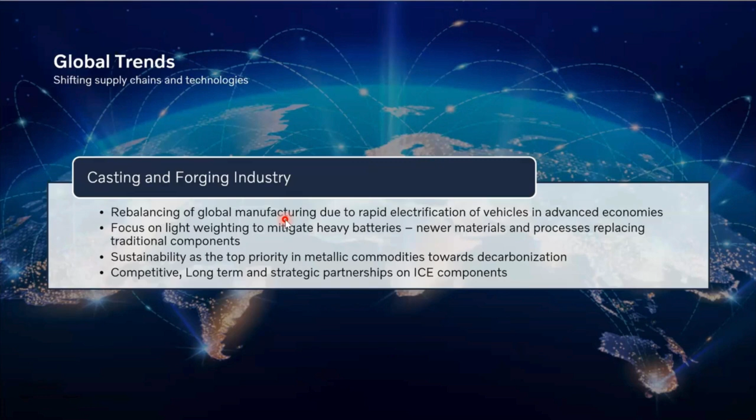And then the third important aspect is sustainability. When we say long distance suppliers, overseas suppliers, there is a lot of transportation, a lot of emission happening, and not only transportation, but from a manufacturing point of view also, there are a lot of emissions associated. So these are some important points, but in the end it is important to be competitive if you want to sustain in a business for the long term.

Yeah, so these are some of the global trends, but what is really happening in India? India is something different if you compare it across the globe. There is some key information about India as a country. First of all, as many of you know, India is ranked lowest in terms of recession in the last few years, and that has consistently been taken care of. We see many countries going into recession. There is a lot of inflation, a lot of job cuts, and so on.

India is also considered to become the third largest economy, and we will reach $7 trillion by 2030. So this is remarkable growth in terms of the GDP we are expecting. We also have had a stable government in the last few years, and a lot of policies are facilitating manufacturing as a segment. As an example, we have the PLI scheme, production linked incentives, which is pushing the manufacturing segment to go for more profitability.

And at the end of the day, India is not considered just a country anymore, but is also considered a partner across the globe by many countries. So there is a lot of impact in terms of strategies, policies, and decision making across countries, which is positive and giving an advantage to India as a country. So it gives a lot of opportunities also. So when you say opportunities, what does it mean? It gives an opportunity to think and work in the direction of sustainability, in the direction of energy transition, moving away from fossil fuel.

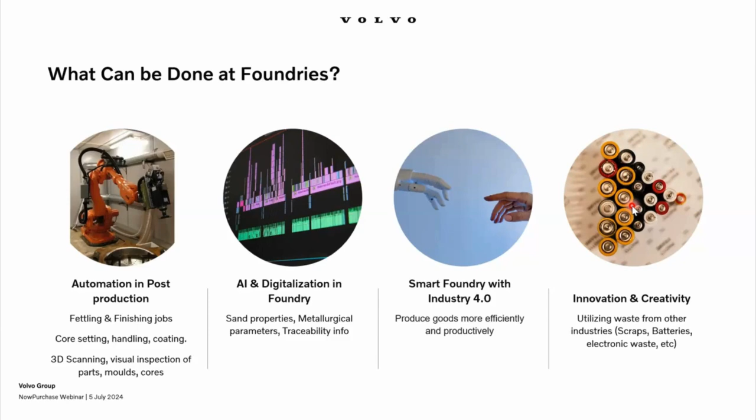And the last important aspect is having innovation and creativity in what we do. This, from my perspective, is the day-to-day job at a foundry. The way you design a gating system, the way you design the tooling, the way you design the process are really important. I've seen foundries using, as an example here, batteries as a raw material, which is an out-of-the-box solution. These are pencil-sized batteries with a steel cap, a graphite electrode, and copper also, which are nothing but raw material for the foundry, and they get these from vendors or from the government free of cost. So we also need to be creative and innovative in this direction. These are some of the areas which we have to think about and explore to be more competitive in the coming days.

Who are the experts in making fuel cells, who are experts in making charging stations available, and so on. So nowadays it's important to have a strategic alliance and even a partnership to make sure that we are meeting all the business requirements. So when we say foundry, what can we do with the foundries? We expect our foundry suppliers to also collaborate with the customers, to have a partnership with the customers to achieve a common goal.

So this is one aspect, but you don't need to restrict yourself to the customers. There are universities who are experts in doing R&D, experts in finding out-of-the-box solutions. So we also need to explore universities for a partnership. Third, but important aspect, there is also a big supply chain and the startups and the foundry supplier base available in the market. As an example, NowPurchase. They have their own unique solution. So we also need to keep exploring this supplier base who can solve our problems.

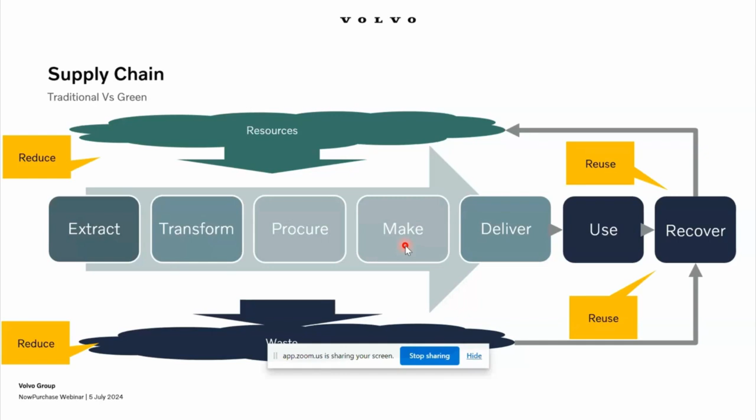So overall, as sustainability towards the foundry, we are expecting all our supplier partners, first of all, to explore more usage of green power, avoiding the use of fossil fuel, really reduce our dependency on petrol, diesel, gas, and go for electrification. There are many solutions available in this direction. As a simple example, many foundries were using cupola, now going for electric furnace, but still in the foundry we use a lot of gas, diesel, petrol. For example, we use them for preheating the ladle, but now the ladles are also electric in nature. Even the steel plants are using electric preheaters nowadays. So we need to find a way to avoid the usage of fossil fuel, because the emission associated with 1 liter of diesel is like 3 kg of carbon dioxide emission. So that is remarkably high.

Apart from that, as I mentioned, we also need to focus on resource consumption. In the foundry, we use energy as one resource, water as another resource, and sand as another resource. I have seen many foundries. If you go to some of the belts, before you enter some of the areas, you see a lot of cores thrown across the road. A lot of cores and molds are used for landfilling. So that's not good. There are solutions available in terms of thermal reclamation nowadays, which can avoid the landfilling. Apart from that, we also need to drive efficiency projects, reduce waste, avoid landfilling, and so on. So these are some of the sustainable ways to make sure that we are profitable within the organization, we are also sustainable, and we are also contributing to the environment. So as a responsible purchaser and as a responsible manufacturer, you have to take care of climate, resources, and people.

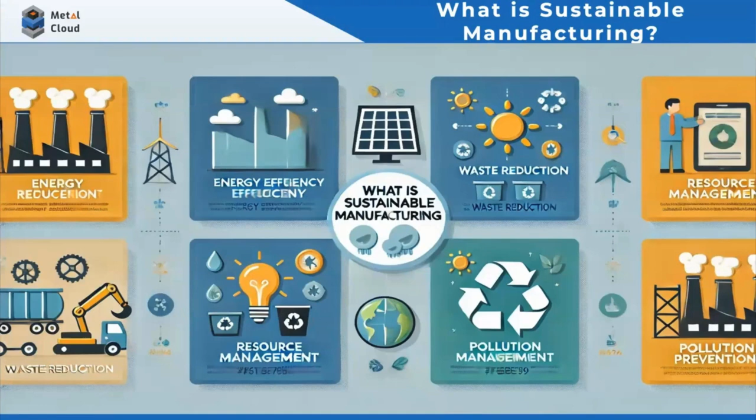Rahul, you talked a lot about how foundries should work on three key parameters: people, resources, and climate. That's equally what we believe, right? These are the three key resources that the word sustainable includes. When we talk about sustainability in the manufacturing sector generally, we talk about energy efficiency, waste, resource management, pollution management, right? But these are not the most important parameters that a foundry focuses on. So I'll be focusing more on the parameters where the foundry can take action to become more sustainable: energy, waste reduction, emission control, and the efficiency of resource utilization. Let's start with energy savings.

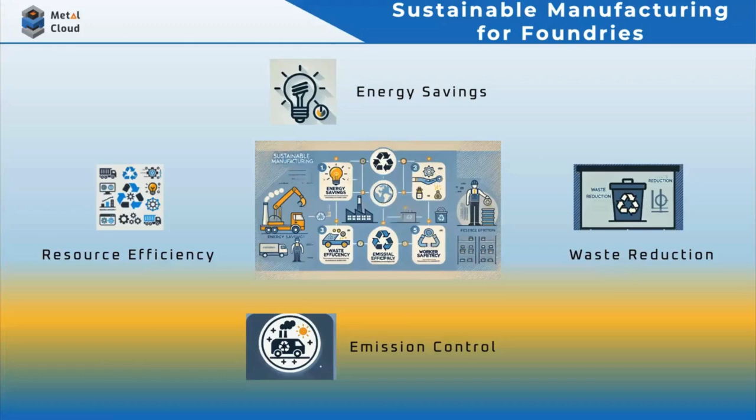When we talk about savings in energy, there are two ways: reducing waste, and reducing energy consumption. There are multiple ways to reduce wastage and energy consumption. One is optimizing charge mix, another is having strict quality control, checking equipment efficiency to ensure proper output with no voltage leakage, and using scraps and pigs and other resources that are less polluting in nature.

For this purpose, we have run multiple experiments. We did this at Brakes India, we are doing it right now at Yash Metallics and Mantri Metallics, and we did it at Tata Ductile Pipe Plant - the elimination of pig iron as a primary resource in casting manufacturing. Typically, if you're a manufacturer of grade 500/7, you consume approximately 500 kgs of pig in a heat, while your scrap consumption is close to 600 to 800 kgs. When you use a charge mix like that scenario, for every ton of liquid metal manufactured, you emit close to 1.6 tons of carbon dioxide, which is a very humongous figure.

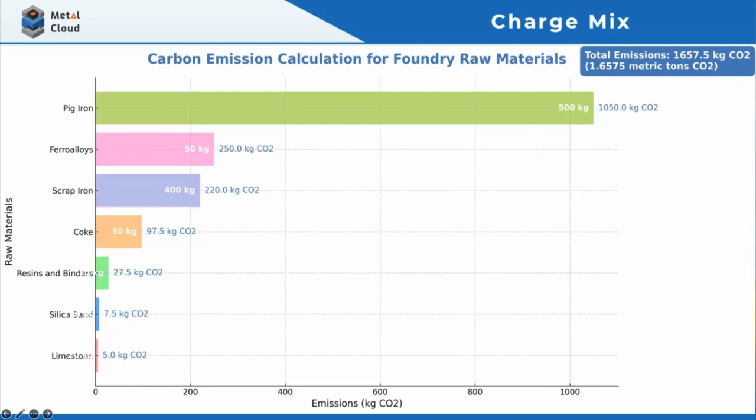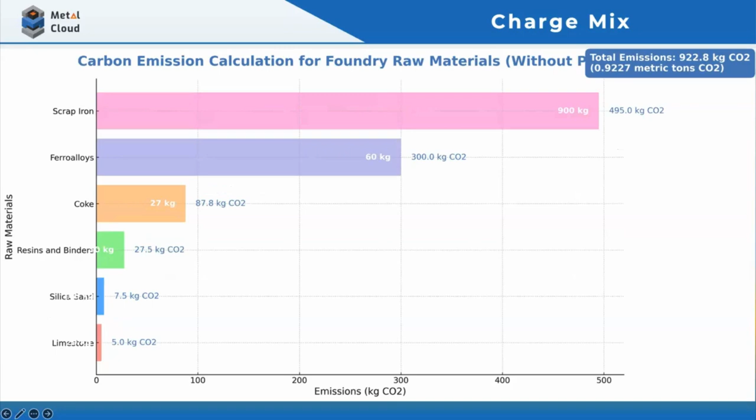When you eliminate pig iron as the primary resource and make scrap the primary resource, the emission per ton for manufacturing a 500/7 casting itself is 922 kgs, which is close to a reduction of 44.3% in carbon.

So just by eliminating one raw material in the foundry, you are saving close to 44.3% of the carbon that is being emitted in that particular process. And that's just from charge mix.

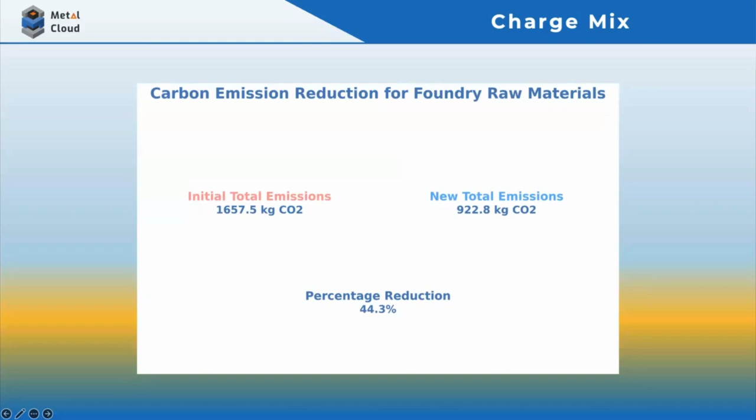This is one of the case studies that we did at Brakes India, where we optimized their charge mix to fully use scrap as the resource, with no usage of pig iron.

Another thing you can optimize on is furnace optimization, because close to 60% of power is consumed in the melting process. One way to optimize power consumption in the furnace is to reduce idle time. How do you reduce idle time? It's the time taken by the worker in the melting shop, either solving a complex problem or doing some kind of work which can be automated.

For example, whenever there is a melt, people generally take a bath sample. Their spectrometer labs are close to 50 to 60 meters away from their furnaces. Someone has to take the sample, go to the lab, take the spark. Then there is the print option.

And when you are printing on paper, you are actually emitting a lot of carbon. A foundry doing close to 100 heats in a day is actually wasting 100 pages. And then there is the loss of time as a worker travels from one place to another with the information.

And the third is the time lost in manual calculation. So you can eliminate those things by having some kind of automation tool where these things are done for you automatically, reducing the idle time as well as the consumption of paper.

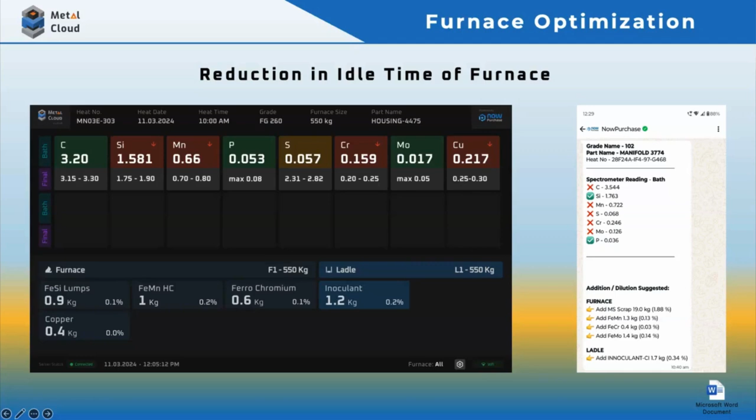One thing you can also do is eliminate loose scrap as well as borings in unbriquetted format. If you use scrap that is loose in nature, it consumes close to 650 kilowatts of energy in an hour. But if you bundle it, it consumes close to 550, a savings of around 15.38% in power consumption as well as CO2 emission.

Similarly, when you briquette the borings rather than using borings directly in the system, you save close to 30% in emissions. Another good factor is that directly putting borings into the furnace causes much higher wastage compared to when it's in the form of a briquette.

Now, moving on, another thing foundries can do to reduce emissions is having tighter quality control. Like Rahul said, before production you should have a kind of prediction. And to have a prediction, you need data. Without data, you won't be able to do any kind of analysis.

So the first thing for any foundry is raw material entry. At the entry gate itself, there should be a thorough check on whether the material you're buying satisfies the requirement of that production. If not, that material should be rejected at the doorstep itself, because every extra step you take eventually leads to wastage.

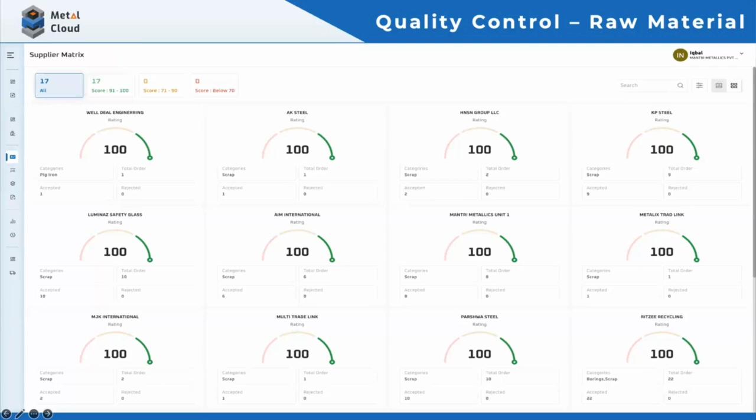Then the second thing is you should also have a quality check on each of your suppliers. As Rahul was saying, you have to have a close-knit community with all your suppliers. You need to evaluate which suppliers are performing better compared to others, so next time you know which ones you can rely on, rather than relying on mediocre suppliers. This reduces the time and resources you consume, and reduces rework. Rework is the most evil thing you can do for a foundry.

Another thing is quality control. When I talk about quality control, let's talk about quality control in the melting section.

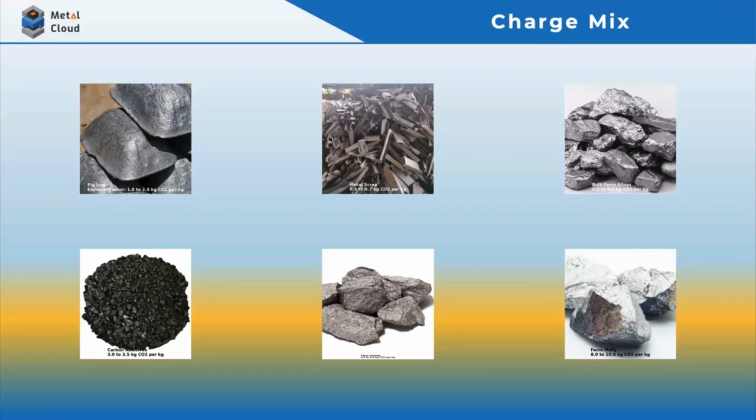And that's where the problem lies, because when you're targeting the mean, it also means you are consuming a lot of additives. If you look at the data, each kg of bulk ferroalloy produces close to 6 kg of carbon dioxide, each kg of carbon additive produces close to 3 kg of carbon dioxide, each kg of ferrochrome produces close to 5 kg of carbon dioxide, and each kg of ferromoly produces close to 8 kg of carbon dioxide. That is worrying data which foundries do not typically take into consideration.

So how do you solve for this? You need some kind of digitization, as Rahul also talked about—digital tools in your foundry where you're able to do root cause analysis, so that next time when you're going to produce something, you're able to predict.

Let's say you track the number of heats you're doing, and if the major cause of concern is carbon, manganese, or silicon, you should be able to predict that if this is going to happen again when producing this grade, why is it that I'm going to get an error in production. And if the error is going to be carbon, why is carbon the error? So that you eliminate it before you produce it, and that's how you save on material cost.

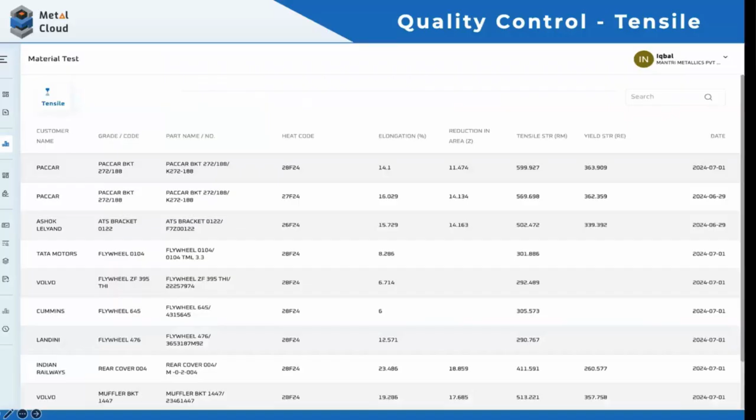Similarly, once the melting is done and the part has hardened, you go for a tensile test. This data should also be readily available so you can see what was actually done in the melting and what you got in the tensile test—was it in the predicted range or not? And if it was not in the predicted range, what went out, and what control parameters changed?

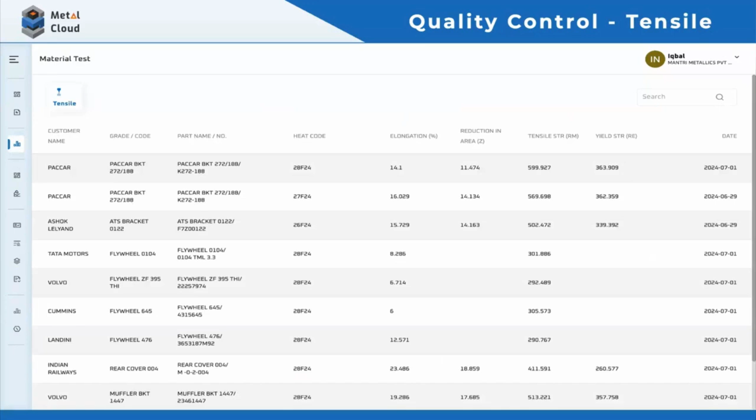So you need all kinds of data in your foundry—be it from your melting section, the spectrometer, the tensile machine, the hardness machine, or the microstructure. You need all this data connected to one source where you're able to get each and every detail.

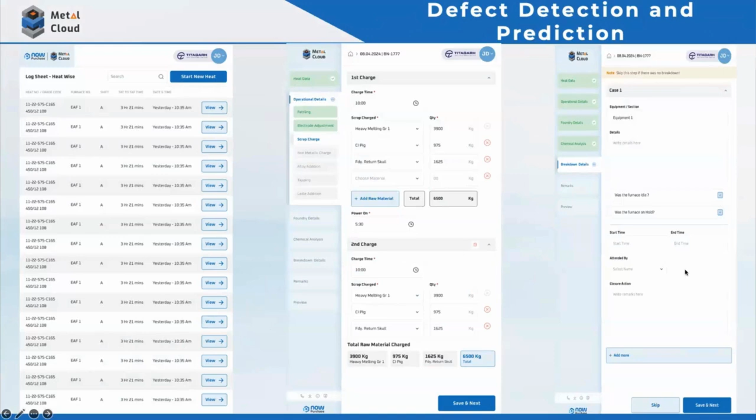For example, this was a project we did at Titagarh, where we completely digitized their log sheet. In the log sheet there is a lot of data available which can actually be used for pre and post analysis as well. So we gathered all the data for the foundry, and let me just show you.

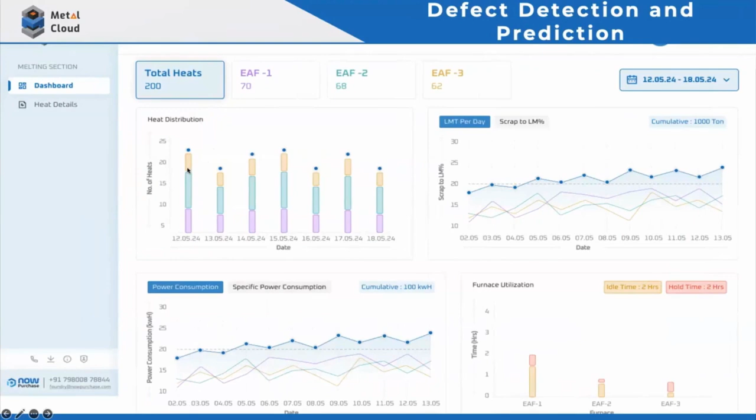Okay, so this was one of the projects we did at Titagarh, and here you're able to see the liquid metal per ton they are producing and the power consumption, and the heat distribution. From here, they are able to gather why they are having erratic power consumption, and because of this we have eliminated a lot of unnecessary factors in production and brought it into a streamlined manner, so that for each heat they have almost similar power consumption rather than sporadic consumption.

Now, let's talk about the eco-friendly practices that you can have in the foundry for more greenery, more sustainability or less carbon emission in the foundry. One thing that you can implement is solar panels, right? Typically, the foundries that I have been to have close to 5,000 square feet of carpet area, of which close to 3,000 square feet is the area available for solar panels.

Now, if you put solar panels on this area, you can actually reduce the power consumption by close to 17.5%. Assuming that each solar panel gives you 4.5 kilowatt hour per meter square per day, you will be able to reduce your day-to-day power consumption in the foundry by 17.5%, which directly translates into a 17.5% reduction in carbon emission as well, right?

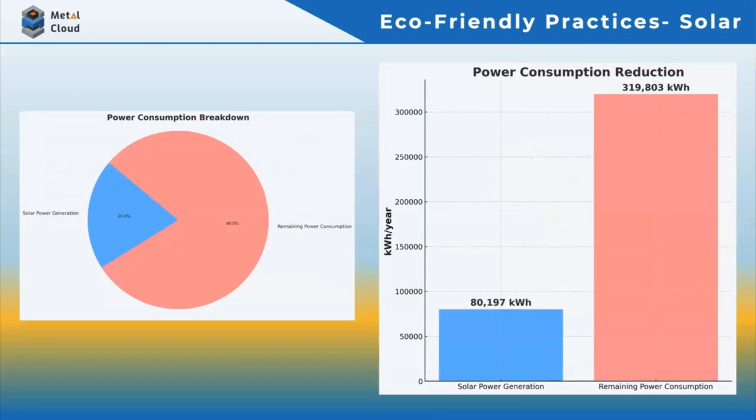And the cost, if you look at it, since the solar panel actually costs a lot, you will typically see that within a span of 3 to 5 years, you will be able to break even. I'm so sorry, right?

And similarly, another very good experiment that I saw at one of the foundries in Coimbatore was waste heat recovery, right? What they were doing with the waste heat recovery system was nothing peculiar, but something very innovative, right? And as mentioned earlier, innovation is the key to solution.

So the mould in which they are going to pour the liquid metal was surrounded with the raw materials which were going to be melted in the next heat, and these raw materials were getting preheated from the heat being eliminated by the mould. And because of this, they were able to save close to 30% in the system.

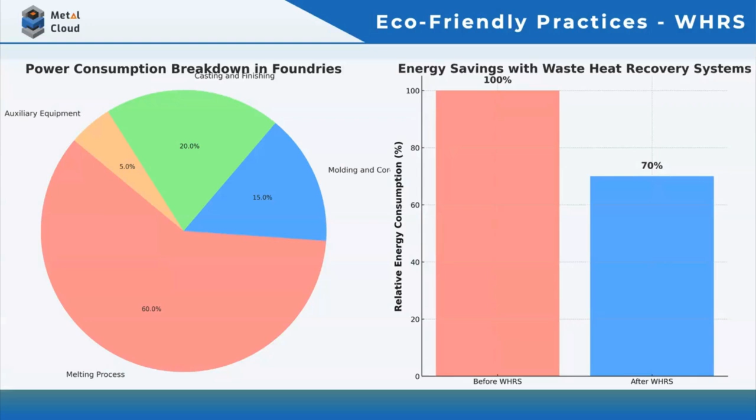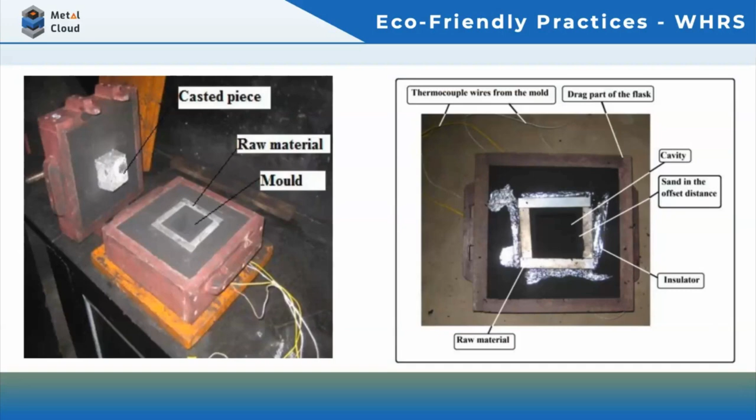So if you look at the power consumption data, close to 60% goes into the melting process, and in the melting process the highest, close to 60-70%, goes in the furnace, right? Because you have to raise the temperature of the raw material. And what they did was the raw material was getting preheated from the heat released by these molds after the liquid metal is poured into them, and they were able to save a lot of energy.

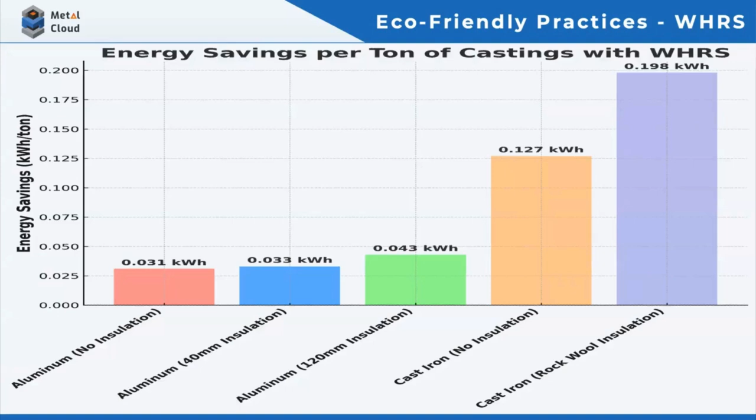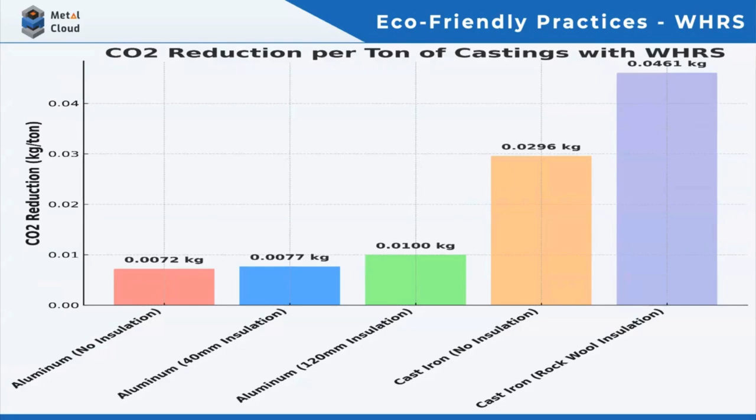And if you look at the data, they did this kind of experiment in the aluminum as well as the cast iron industry, with insulation and without insulation. With insulation, we were able to save close to 0.2 kWh of energy per ton, which translates to close to 11% of the power consumption. And with that, you will be able to save close to 50 grams of carbon per ton of casting production. Okay. Yeah, so that's all from my end.